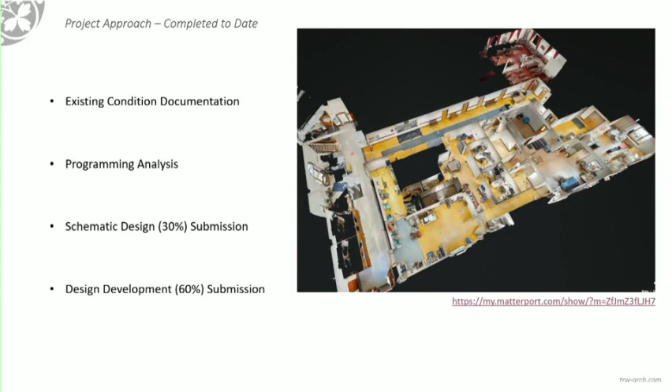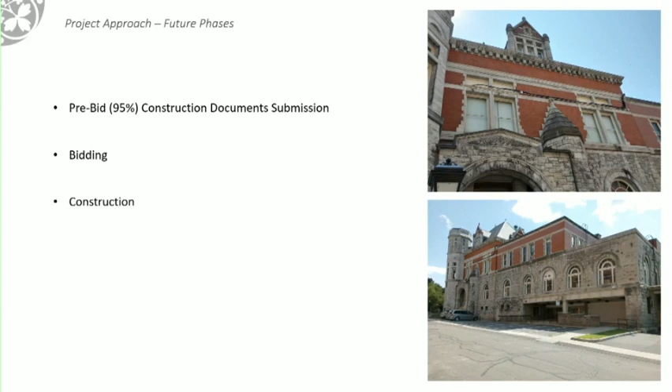And the future phases are construction documents. We're currently in the process of developing those. Then we're going to go on into bidding and then construction.

So I just want to talk a little bit about the scope of work. Originally, the scope of work was essentially the offices, the WIC offices that were vacated out of one portion of the first floor of the building, taking that space over to provide an additional courtroom with the spaces that are needed with the courtroom, like conference rooms, judges' chambers, etc. Provide a public waiting area for both of the two courtrooms, relocate the security office, and provide one new toilet room.

But one of the things you have to understand is that was a good start to get an understanding of what the city needs are, but what we need to do, and what we did do, is come in and really understand the needs of the building. Through our programming analysis phase, we did learn there were a couple of things we had to do beyond that.

On the revised scope, we're still adding this needed additional courtroom, but a couple other things happened. We needed to figure out how secure holding of prisoners was happening, because currently, first off, they don't have a separate men's and women's real secure area for secure holding. They don't have a private toilet facility for them, and they didn't have a good circulation path, so you had to bring prisoners through the public spaces. So we had to fix that. Even though that wasn't part of our scope, it would be us not doing our due diligence to just give you that new courtroom where there's all these deficiencies.

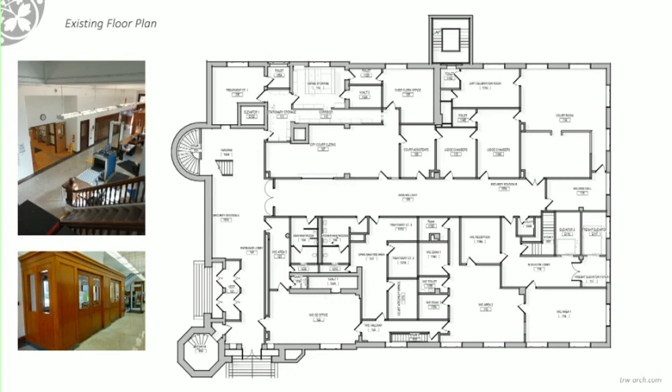I'm going to run through the basic design for the revised scope I talked about. In this area here, we're proposing the new trial courtroom. It's a standard courtroom with a public area, a litigation area, jury box, judges' bench, and a jury deliberation room with its own private toilet facility.

Now this is what I was talking about regarding revising the secure holding area. We're keeping the secure holding area roughly in the same place, but one of the things we're proposing is to remove the old freight elevator so we can create a secure holding passageway connecting the existing courtroom, room 114, up top, with the new courtroom. So you have a secure way to get prisoners up into the building and to the courtrooms without having to go through public spaces.

We also added a toilet facility for each of the secure holding areas, and we're now trying to provide an interview booth so attorneys can meet with their clients in that secure area if needed.

Then we added the public waiting area, so there's a bit more of a wait area for people instead of just waiting in the hallway for the two courts.

We added some additional spaces needed for the trial courtroom, like the judges' chambers, conference rooms, visiting judges' spaces, and a space for the county attorney.

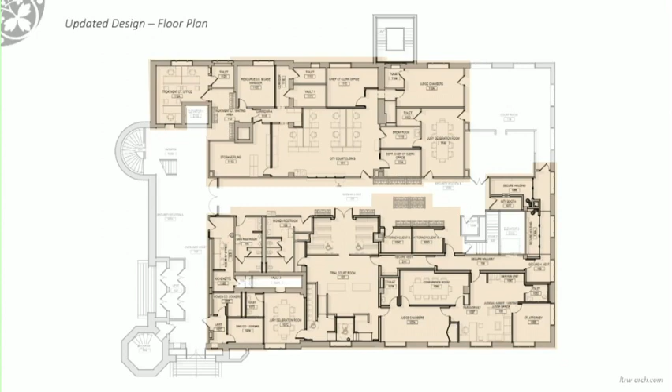So in general, that's the new plan.

This is something we'd like to share. It shows all the different city functions, color-coded by court clerk, trial courtrooms, and other ancillary spaces.

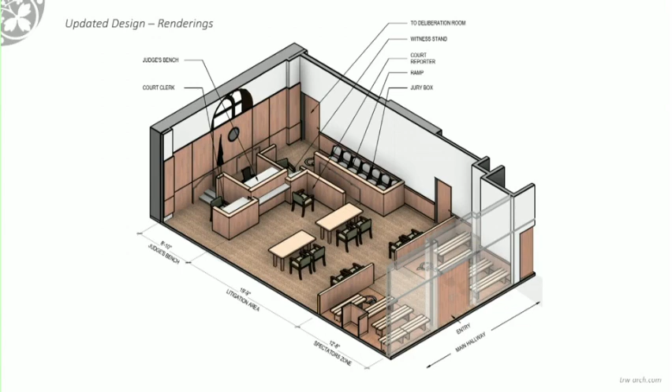Here's a rendering of what the new courtroom could look like, and here's another rendering of what it could look like.

So to tie it all up, one of the things we do in our work is usually try to put 10 pounds of stuff in a 5-pound bag. We're always trying to maximize our space, especially when working within the confines of an existing building. So we worked diligently with both the county and the city to come up with a program and Office of Court Administration that works for you guys, but also fits within our confines.

When you're working in a historic building, we have to also be cognizant of the changes we make. In this design, we're always trying to maintain and also emphasize what we call historic fabric - stuff like that column you see there, the old mailboxes, the coffered ceilings. So not only are we providing a new modern court facility, but one that works within the historic confines and environment.

As I talked about through this presentation, we're also meeting current OCA requirements and all new building code requirements, and minimizing disruptions because courts don't shut down. We have a plan for that, not shown here. Essentially, since you guys have an active courtroom, we keep that active and renovate the new courtroom, and once the new courtroom's ready, we can shut down the existing courtroom to make renovations there. We always have to think this through for court facilities to minimize disruptions.

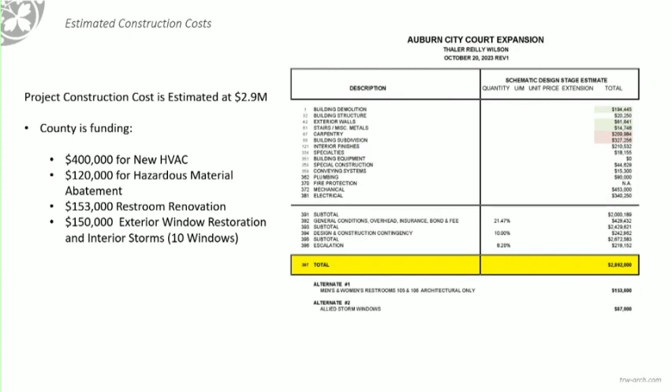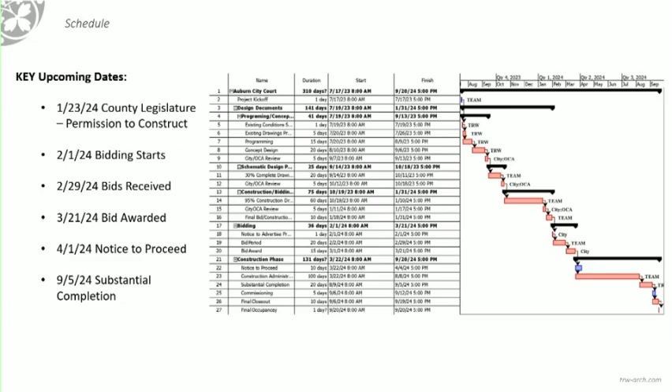So that's it in a nutshell. I think unless you have anything to add, we're ready for questions or anything.

So how close were you working with the OCA? Have they seen what we've seen tonight? I just want to get a sense. They have - well, they haven't actually seen what you saw tonight, but they've seen previous iterations, and they've been involved with our meetings, giving us guidance. So I'm assuming that they're very much in line with everything.

Yep, with everything, because that's one of the reasons why we're doing this. So, very good. That's good to hear, they're on board. Great. I think actually, the last go around, they had very minor suggestions, and I think we picked up all those suggestions. Great.

Curious, as this project moves forward, what happens to the materials that you might be moving out that are original to the building? Do you look at deconstruction versus demolition when you're taking apart an area? Or what do you use as your guidance?

So, as you all know, this is a SHPO, a National Register building. Our design strives to remove very little, if any, original or historic fabric. It's a combination of either not removing it and leaving it in place, or if we have to put a drop ceiling in, we keep the coffered ceiling up but just put the drop ceiling in. There are some rules with OCA that have a maximum ceiling height, which is kind of... don't get me started on that.

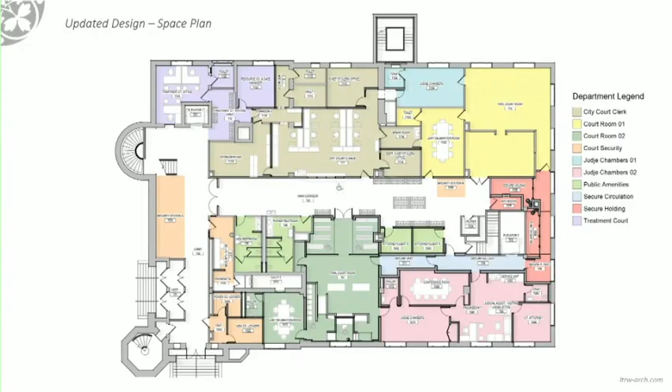It's really cool, I'm hoping you guys can see this. It really shows we're only using half the floor right now, so we're very much doubling our size of space, which is really needed. If you've ever been in the city court clerk office, they are quite cramped. Oh, there we go, there it is. All right, I'll let you be the driver. Go slow.

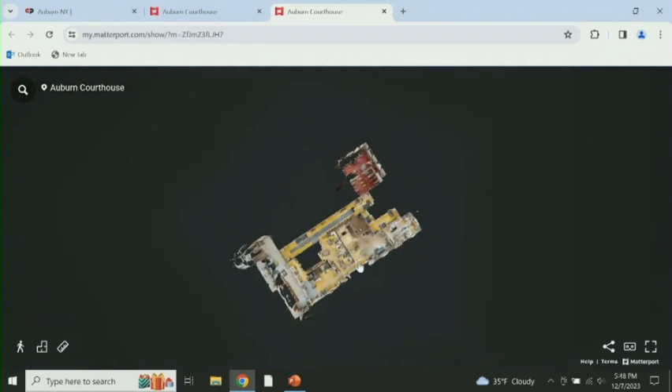So this kind of gives you an overall view. Because it's depressing, yeah, it is. Not only does OCA mandate that you meet the current requirements, but they are expecting a higher level of design too. So, yeah.